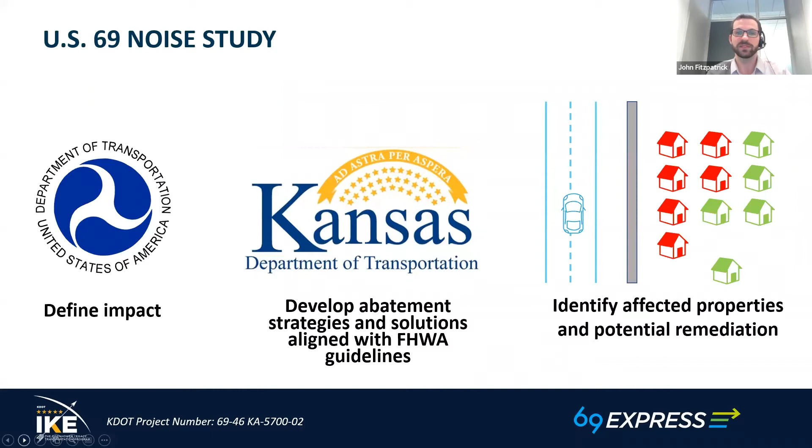So how do we evaluate the existing and future noise conditions in the project area? As part of the federal regulations, Federal Highways has a software called the Traffic Noise Model, or TNM, which is required to be used on all traffic noise analysis. In the traffic noise model, a model is built of the project area, including the roadways, the terrain, the homes, traffic volumes, number of trucks, speeds, etc.

We start off building a model of the existing conditions to understand the existing noise environment, which is then validated using field measurements to make sure the model accurately reflects the conditions in the corridor. Once our existing noise model has been validated, it is then modified to reflect the project design. In this case, that includes the express lanes, interchange reconfigurations, and any other project designs. At that point, we can then use the future traffic volumes, which are projected to be greater than existing volumes, to predict noise levels in the future everywhere in the project area during the loudest hour of the day.

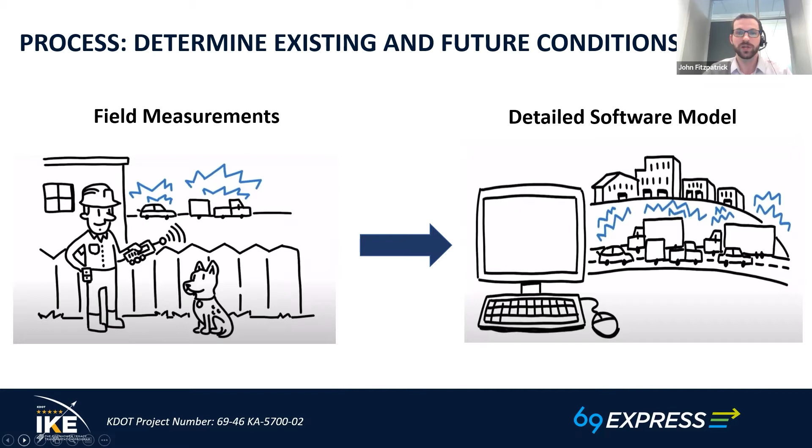So we've built models representing the existing and future conditions in the corridor. How does that translate into identifying noise impacts? A noise impact is defined in one of two ways. First, if the average noise level during the loudest hour of the day is 66 decibels or higher, it is considered a noise impact. For the purposes of this noise study, this is determined by using the future conditions. So that includes the express lanes and the traffic projected in the year 2050. Many noise sensitive areas near highways already meet this threshold with today's conditions.

And the traffic noise study confirmed this is the case along most of the US 69 corridor, with almost 1,000 locations already meeting that number. In the future, without any noise abatement, this number is closer to 1,500. As I mentioned previously, noise studies are only completed when capacity is being added to the highway. So even though many locations meet the 66 decibel number today, the 69 Express project is the opportunity to examine these noise impacts.

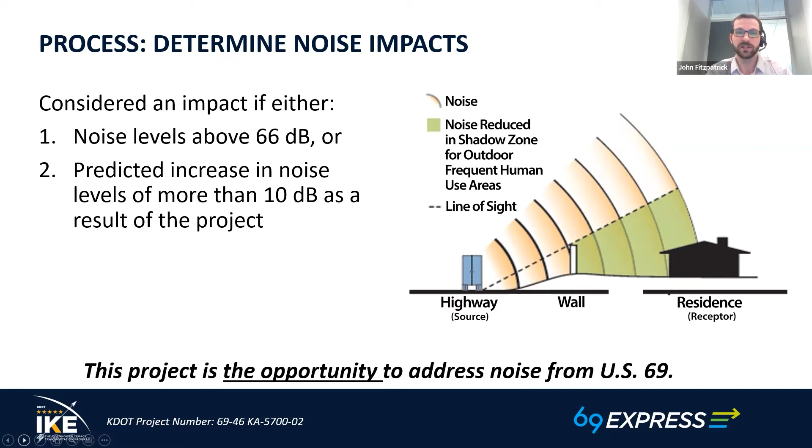The second way a noise impact is defined is if the noise levels predicted in the future are more than 10 decibels greater than the existing noise levels. This is rarely the case in highway widening projects and mostly occurs where a new highway is being constructed or the alignment is being altered significantly. No locations in the 69 Express study area are expected to have this large of an increase.

Once the traffic noise impacts are identified, noise abatement is considered. There are a few different noise abatement strategies, but in a corridor similar to US 69, noise walls are the most common strategy. It's important to note that noise walls are typically only effective for about 300 feet and need to be designed properly in order to be beneficial. Beyond that 300 feet, there's usually not much noise reduction, though each site is different based on factors like the topography.

One of several advantages of using the FHWA traffic noise model is not only that it can predict noise impacts in the future, but it also is used to analyze how effective different noise wall layouts would be. It enables us to optimize the alignment and the height of the wall to ensure it will benefit those impacted by noise. When analyzing noise walls, it must be both feasible and cost-effective in order to be recommended for construction.

Feasibility generally deals with considering whether it is possible to build a wall given the site constraints. It can be limited by the topography, the presence of cross streets, drainage, utilities, and maintenance concerns, to name a few. The cost effectiveness is a process outlined by the federal regulations, which gives states some flexibility. For the 69 Express project, a cost-effective wall was defined as one that would require no more than 1,800 square feet of noise wall per benefited residence, which I'll explain more in a minute.

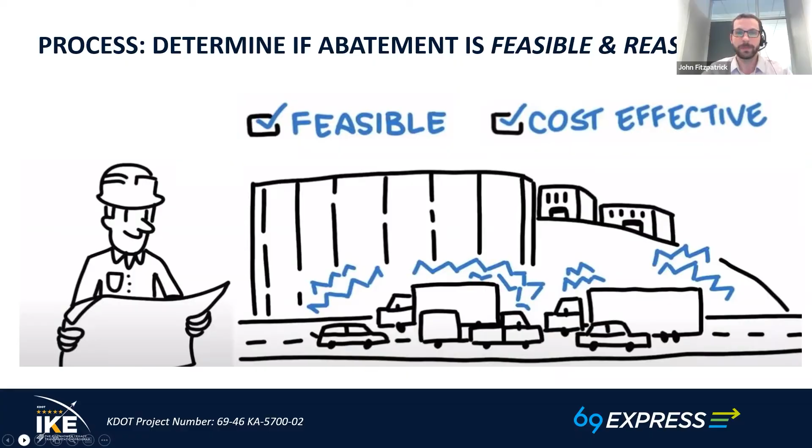Noise walls were found to be both feasible and cost-effective at 14 different locations throughout the corridor. 11 of these locations are within the limits of the first phase of the 69 Express project, which extends from 103rd Street to 151st Street. The other 3 are located in areas of future phases of the project south of 151st Street and will be recommended for inclusion when capacity is added there.

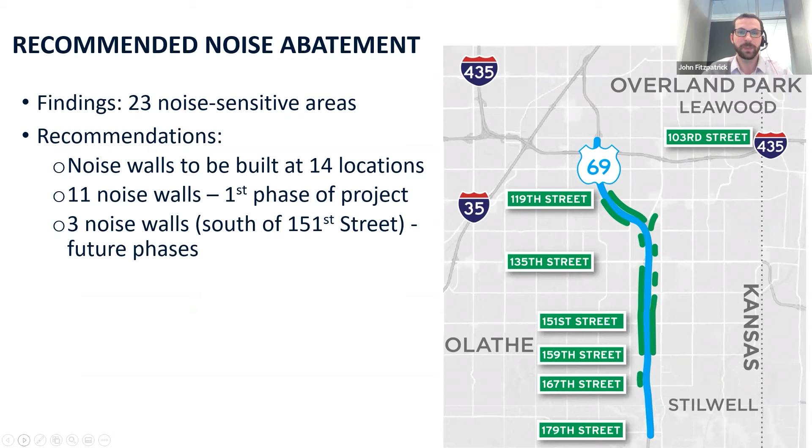A more detailed map showing these noise wall locations is available on the project website at www.69express.org. This interactive map also shows locations where noise levels were modeled. A high-level view is shown in the image on the right, but the map online allows you to zoom in on your specific area of interest. The color of the dots indicates the results of that location from the noise analysis. When looking at multi-level residences, such as apartments, each individual floor is shown separately, since the noise properties can be very different at different elevations.

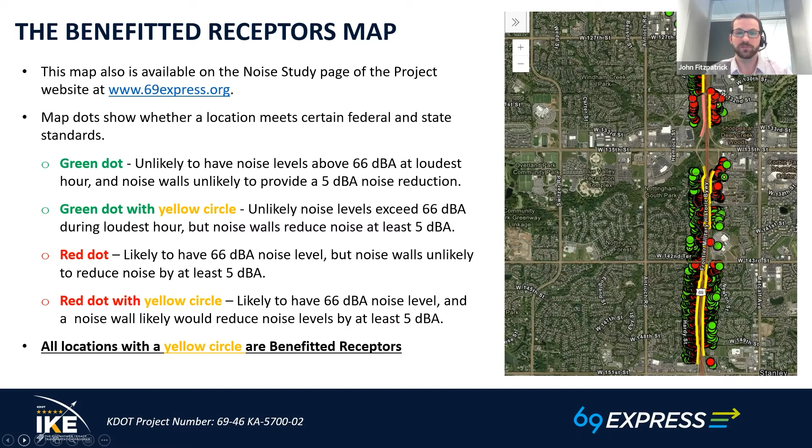Also, some dots may represent multiple receptors. For example, a single dot may be shown at a duplex, but both residences are counted as separate receptors. Green and red dots indicate whether a receptor is considered impacted by noise, or over that average 66 decibel threshold. Red dots are locations that are impacted by noise and green dots are not. You'll also note that some dots, regardless if they're green or red, have a yellow circle in the middle. Any location with a yellow circle is considered a benefited receptor, or a location that would benefit from a noise wall.

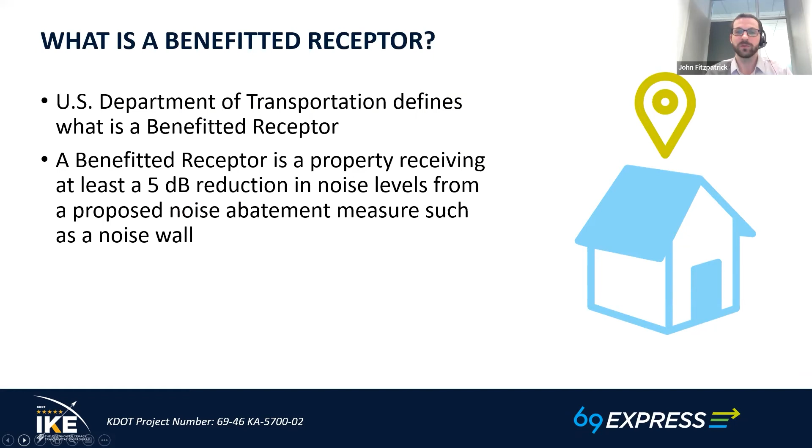So what exactly is a benefited receptor? The US Department of Transportation has set that definition. A benefited receptor is a property that is projected to receive a minimum of a 5 decibel reduction in traffic noise from a noise abatement measure, such as noise walls. While some properties might still experience a noise reduction from a noise wall, if it doesn't meet that 5 decibel minimum, they are not considered an official benefited receptor.

To determine where the benefited receptors are located, as mentioned before, the detailed noise model was used, which allowed us to examine how effective different barrier locations would be and how tall they need to be to effectively reduce the noise. Generally, every receptor within about 500 feet of US 69 was looked at, though the analysis did go out further when necessary to make sure all noise impacts were captured.

The model looks at exterior areas of use at each home, which are placed on the side of the home facing the highway, usually about 5 feet away from the home itself. So picture yourself walking outside of your home about 5 feet towards the highway. That's where the noise model is predicting noise impacts and analyzing how effective a noise wall would be. And just to reiterate, a receptor is considered officially benefited if at least a 5 decibel reduction is predicted to occur with a given noise wall.

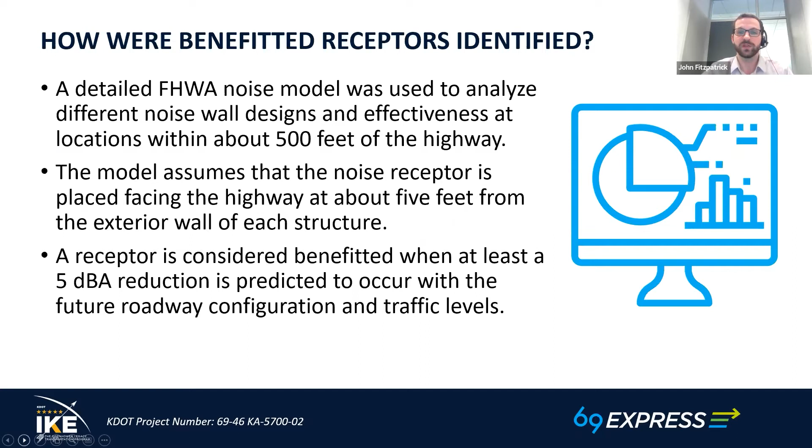Now I'll pass it over to Cameron to talk more about the voting process. All right, well, thank you, John. Now that John has walked through the study process and the results, I want to spend some time explaining the voting process and how many of you as benefited receptors have a voice in whether or not the recommended noise walls get constructed as part of the project.

So as John covered, the detailed software model is used to analyze both existing and predicted future noise levels, and then to develop the noise abatement measures that can effectively reduce those noise levels. And from that analysis, the locations that will benefit from the proposed walls were identified. If it's predicted at a location that you'll see a reduction of 5 decibels or more, then those are the locations that are identified as benefited receptors.

So the next step in the process is to solicit input via a vote from those benefited receptors. To solicit that input, ballots have been mailed to all the identified benefited receptors, asking them to vote for or against the proposed walls that are adjacent to their property. KDOT will then tally the ballots that are returned, and if 70% or more of the votes received are in favor of the noise walls, then it will be constructed as part of the project.

The reason why the threshold is 70% and not just a simple majority is that noise walls are a major investment, and KDOT wants to ensure that there is strong community support for the walls before they make that investment. I do also want to emphasize here that the results of whether or not the noise walls are constructed will be based on the ballots that we receive back, regardless of the number of ballots that we received. There is no minimum threshold for responses or a required response rate.

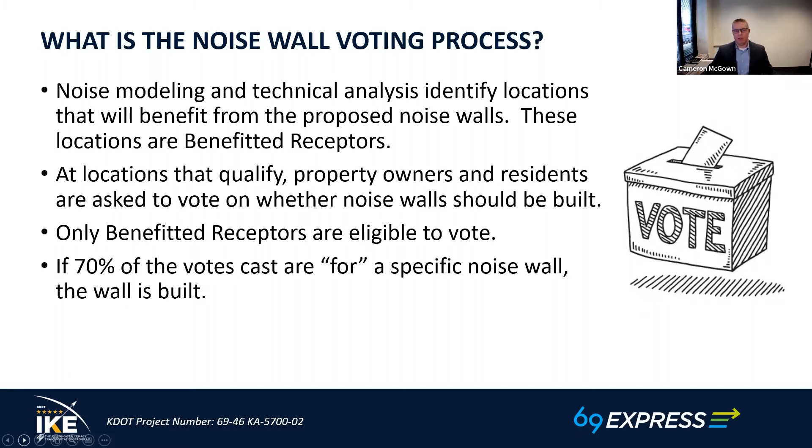So with that in mind, we very much encourage those of you that receive ballots to return those to us. And I will talk here in a few minutes about ways that you can return your ballot and make sure that it is counted. So since the benefited receptors are the ones that are eligible to vote on the walls, they were notified directly by letter, over 1,400 individual letters and ballots, about this meeting and other opportunities to meet with the project team to learn more about the proposed noise walls that are coming out of the study. We want to make sure that there is an opportunity for them to be informed and to ask questions of the team before they make a decision.

But just because we reached out to them directly, it does not mean that these meetings are closed only to the benefited receptors. Anyone is welcome to attend, and we certainly encourage attendance by anyone that's interested. As such, these meetings have been publicized in a variety of ways through media and social media to try and get the word out.

So we've discussed how the benefited receptors were identified and the opportunity that they have to vote on the proposed walls, but you may be asking, what are they actually voting on? So I want to provide a little bit of clarity on that. As we've already said, this is an important step because under both federal and KDOT policies, the recommended noise walls cannot be built unless there is a strong desire by the community and from the benefited receptors for them to be constructed.

But in terms of what they're voting on, very simply, benefited receptors are voting on whether they do or do not want a noise wall adjacent to their location as is proposed coming out of the detailed noise study. These are essentially up or down votes based on the walls as we're showing them to you now and as we can talk through during questions and answers.

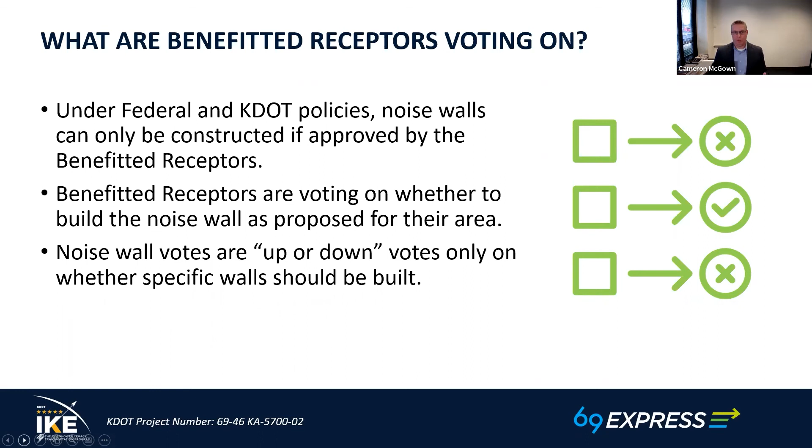But because this is an up or down vote, based on what we're proposing out of the noise study, there are a handful of elements that are not part of the voting process. I'll cover those on the next slide. So those items are shown here. Items like the type and material of the wall or the physical attributes such as the placement, the length or height, those are not part of the voting process.

And the reason for that is because those elements, if they were to change, could significantly alter the effectiveness or the feasibility of the walls. Additionally, items related to visual appearance are also not part of the voting process. So the wall material, the color, surface design, those have all been selected to balance aesthetics and cost and long-term maintenance of the walls.

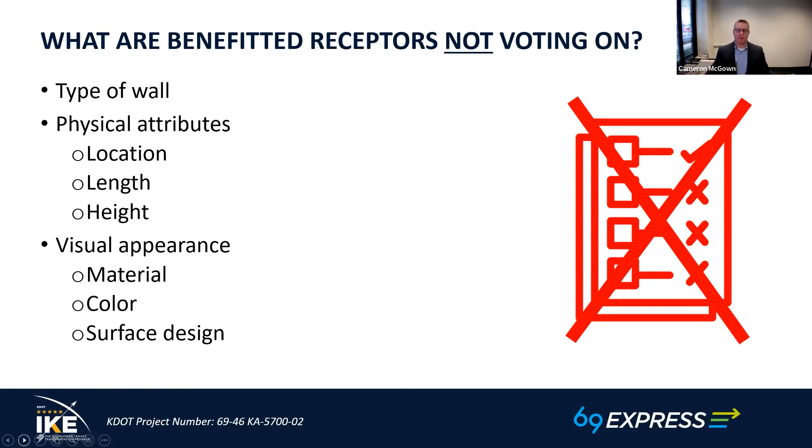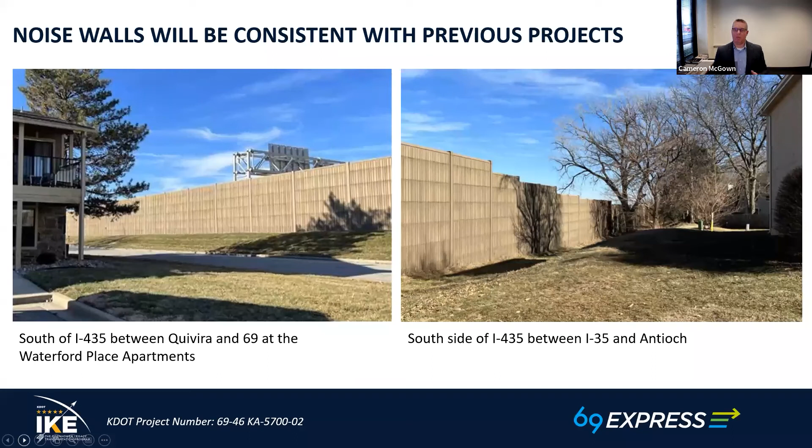But with respect to aesthetics, the intent with this project is to maintain a consistent look as what has already been built in many other locations in Overland Park on other segments of either US 69 or I-435. And we've shown here a couple of examples of what these walls look like, not necessarily from a roadway perspective. Many of you are probably familiar with that as you've driven the corridor already, but more from the perspective of an adjacent property owner. As we get into questions and answers, we do have some other examples that we can bring up, and we hope to be able to provide a sense of what these walls could look like from your property.

So if you are a benefited receptor, hopefully by now you have received by mail a letter from the team and a ballot that is unique to you. And the ballots are unique to each benefited receptor for a couple of different reasons. Number one, we want to ensure that there is integrity in the voting process. And two, we want to ensure that we're considering the votes on a location by location basis. It's possible that some locations will be for a proposed wall and others not in favor.

I do want to make it clear that while we provide a number of different opportunities for you to submit your ballot, please only do that one time. Duplicate submissions or conflicting ballots from the same location will be discarded and not counted. So please only submit the ballot one time.

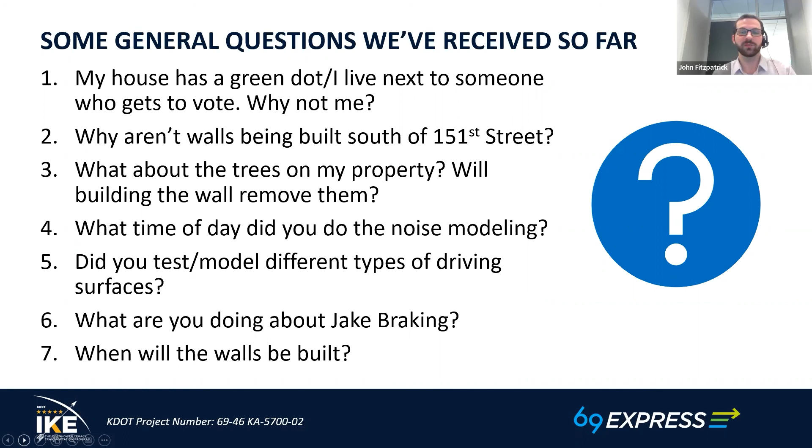The next question: did you test or model different types of driving surfaces? The federal guidelines require the use of what's called an average pavement when determining noise impacts. While different pavement types can cause different noise levels, it's typically only a couple decibels above or below this average pavement type, which for perspective is considered barely perceptible by the human ear. Using this average pavement also accounts for the changes in pavement that occur over time, which are constantly occurring. The actual pavement type used for the 69Express project will be determined by the design-build team.

Okay, and then the question: what are you doing about jake braking? We have gotten several questions about jake braking, a lot of folks noting that this is a big contributor to noise along the US 69 corridor. And I'm glad that this is getting brought up. We had an opportunity to look into this, and jake braking is actually already prohibited along US 69.

So the best way to affect this is by encouraging increased enforcement of this existing ordinance. If you're experiencing this, we encourage you to contact the non-emergency number for the Overland Park Police to report it. That number is available on the website. So I'd ask you to go find that and report it if that's something you're experiencing frequently.

And then the last question: when will the walls be built? Unfortunately, this is something that we can't provide a specific response on. The reason is that we're intentionally providing a great deal of flexibility to the contractor on how they want to progress the work on all of the improvements that are part of the 69Express project. We're not requiring them to build the noise walls first, mostly because the erection of the walls can significantly limit their ability to access the site and get equipment and materials into the areas where they're trying to work.

What I can say, just based on experience on other projects in this corridor that have had noise walls, I would predict that the noise wall construction will likely occur in the back half of the construction timeline. So that would put the majority of these walls under construction in the 2024 to 2025 timeframe.